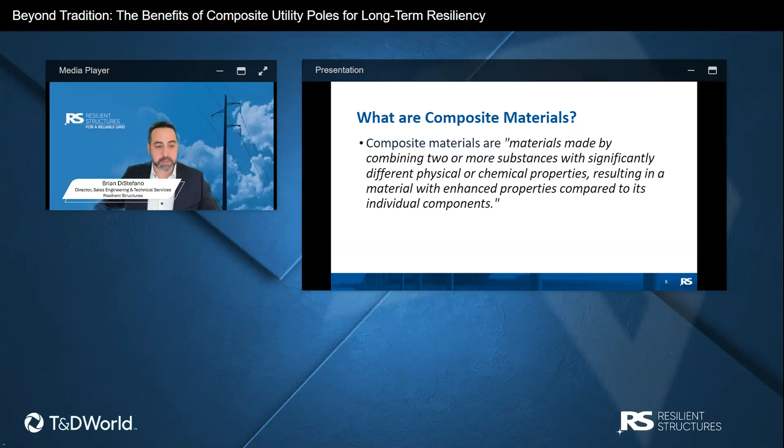Okay, great. What does that mean, right? When it comes to composite utility poles, sometimes they're called FRP poles, which stands for fiber reinforced polymer. They're basically made by combining fiberglass and resin, just like you see on the screen. We have fiberglass rovings, and they're soaked in resin, and they are made into a pole. Sounds simple, but it definitely is not.

Exactly how these two materials are combined to make a superior utility structure, I will go ahead and explain in some future slides. But just to get into a little bit of the individual components, the fiberglass that's most commonly used is called e-glass or electrical glass. It's commonly used in many industries, including construction and marine applications, and of course, utility poles. It got its name because it was originally developed for insulating electrical wires, and then they found many other uses for it. So the fiberglass piece of it is very common. What really sets composite poles apart from each other is the resin that's used, as well as the manufacturing processes. That's really what differentiates composite poles and composite utility pole manufacturers. All composite utility poles are a combination of fiberglass and resin, but not all composite utility poles are the same.

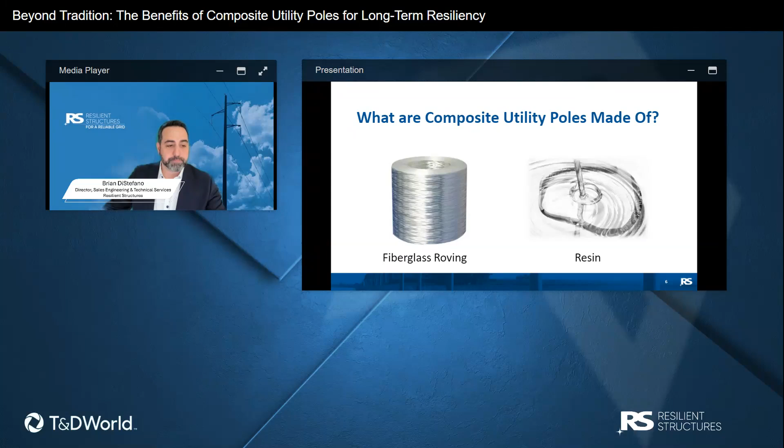I'd like to discuss the three primary resin types commonly used in the composite pole industry: polyurethane, vinyl ester, and polyester.

Polyurethane resin is the resin of choice here at RS for a wide variety of reasons. We actually use a proprietary recipe of two different types of polyurethane resin in our product, which I'll explain later. Polyurethane is very strong, very impact resistant, has excellent UV resistance, excellent screw retention, and offers a very good balance of flexibility and durability. The downside is it's the most expensive of the three, and it's also very difficult to use in a pultrusion manufacturing method, which I'll get into as well.

The happy medium is vinyl ester, which is less expensive than polyurethane. It's easier to manufacture with and to handle, provides good durability, excellent chemical resistance, and bonds very well to various substrates. It's less expensive than polyurethane but more expensive than polyester.

This resin, along with polyester, uses styrene to help the resin cure. Styrene has a very distinct smell. If you've ever walked into a boat yard doing hull repair with fiberglass matting soaked in resin, it's a very distinct, strong smell of volatile organic compounds, VOCs, emanating in the air. You cannot mistake it. So for the comfort of manufacturing workers, and for residents or other businesses in and around a plant that uses styrene, it's not the most comfortable type of environment.

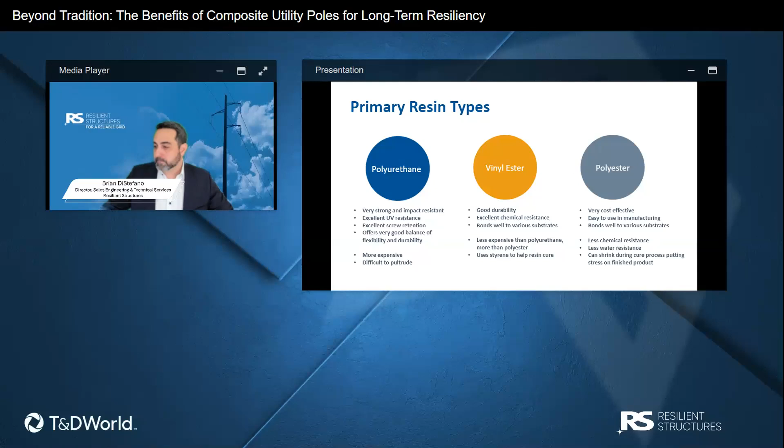Next, I wanted to briefly share some of the mechanical properties of the three different resin types. After reviewing this, it should be pretty evident why RS chooses to use polyurethane resin for its poles. When you compare the three resins, you look at flexural strength, compressive strength, bearing stress, and interlaminar shear.

What you'll see is that polyurethane outperforms vinyl ester and polyester by a significant margin. These reasons, coupled with polyurethane's outstanding UV resistance, are why RS chooses to use it despite it being the most expensive and difficult to manufacture with. Manufacturing with polyurethane has taken RS years of R&D to perfect, but we believe it produces an absolutely superior product.

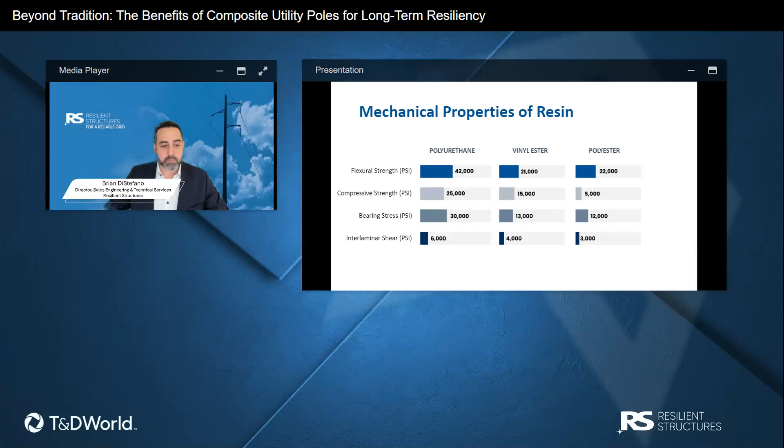Now, allow me to shift and discuss two different composite pole manufacturing processes.

Filament winding is the process RS currently uses to manufacture pole modules that make up our composite utility structures. The process involves saturating fiberglass strands with resin and tightly wrapping them around a tapered mandrel, as shown in the illustration. Multiple alternating layers are applied with fibers arranged both around the circumference of the mandrel and along its axis. The circumferential layers enhance the hoop strength of the structure, while the axial layers contribute to its bending strength and overall stiffness.

After constructing the module, the resin bath is switched from an aromatic polyurethane resin to an aliphatic polyurethane resin. This is the first time I've introduced those terms, and I'll explain more about that. The aliphatic polyurethane resin, which forms the outer coating of the module, is tinted to give the pole its final color, either brown or gray. These final circumferential layers are applied with a very high resin content, higher than the resin content of the structure beneath, resulting in a resin-rich surface that boosts the finished product's durability and significantly enhances its UV resistance.

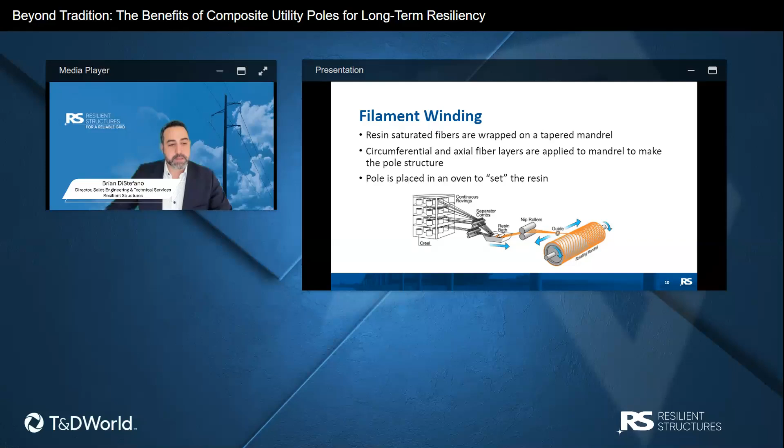So here is a cross-sectional image of one of our poles. You can observe the distinct layers. The gray regions consist of the aromatic polyurethane. That aromatic polyurethane, although it doesn't have great UV resistance, gives the pole its excellent structural integrity and provides the core strength and structure of the pole. The outer brown layer gives the pole its final color, but more importantly, that is the aliphatic polyurethane layer, which offers durability and UV resistance, as I mentioned in the prior slide.

UV exposure is the primary cause of composite degradation. All composite poles include some form of UV protection—they must. So a lot of manufacturers will actually apply a thin UV resistant paint that's microns thick. Our product features an integral outer layer, 1 to 2 millimeters thick, of aliphatic resin, ensuring that the pole doesn't chip or require any kind of periodic reapplication. The robust design here is crucial for long-term resiliency, particularly in extreme environments. It enables the utility to rely on the performance of the product, engineered to endure over 80 years with no required maintenance. So we're pretty proud of that process.

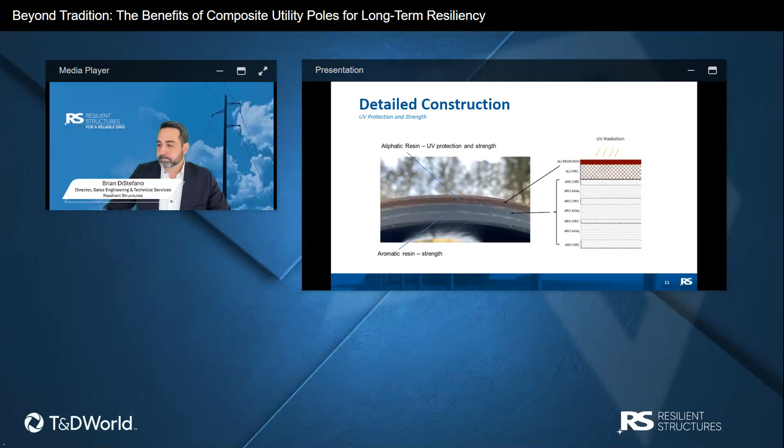A common question we get from utilities is why we don't use a veil cloth. The reason for that is, in pultrusion processes, a veil cloth is typically required to achieve a resin-rich surface, which prevents fiber blooming and also gives the pole its outer layer of strength for damage resistance. Our manufacturing method inherently produces a resin-rich surface without a veil cloth necessary, so we don't need to add one. The final resin-rich surface, with all that aliphatic resin, provides the finished surface. That's actually a pretty common question that we get.

So I mentioned pultrusion a few times. Just to go into the process a little bit more, pultrusion is a manufacturing process in which resin-saturated fibers are pulled through a heated die—very different from filament wound products. To form a resin-rich surface in pultruded poles, a veil cloth is typically required, which is what I mentioned in the last slide. One advantage of this particular method, though, is its continuous operation. Parts can be manufactured indefinitely and then cut to the desired length, all without interrupting production. Pultrusion also produces a uniform, non-tapered profile. However, the height of the pole made through this process is limited by its base diameter, so larger dies would be needed for wider bases, which could require changing out equipment, causing production downtime. Also, using polyurethane resin in this manufacturing process presents many challenges and is quite difficult.

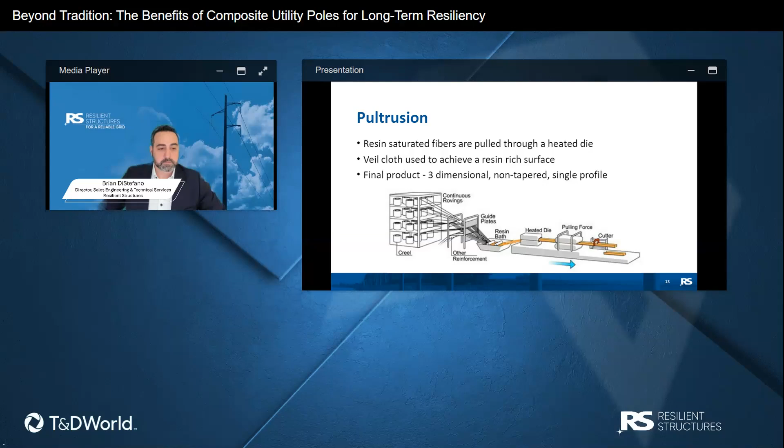Okay, so now I'd like to move on and talk a little bit more about Resilient Structures and what makes us unique.

Resilient Structures, RS, was founded in 1995 and have been making composite utility poles since 2005. This year, we're proud to celebrate our 30th anniversary in business and our 20th year making poles. We have invested over $400 million in composite material science, R&D, and commercialization. We currently hold 71 patents and 13 trademarks. We have had no structural failures due to extreme weather events. We manufacture 11 modules that can make up over 260 different finished pole combinations.

An overwhelming majority of what we sell and deliver, however, are fully assembled poles, similar to the way that you might receive a wood pole. Customers generally like that because if they're not space constrained in their yards, it's much easier just to pick up the pole and set it just like you would a wood pole, rather than having to put it together on site. We have over 500 customers in 30 countries around the globe, and since 2005, we have manufactured 1,200 linear miles of poles, which is enough to stretch from El Paso, Texas, on the west side of Texas, all the way to Montgomery, Alabama.

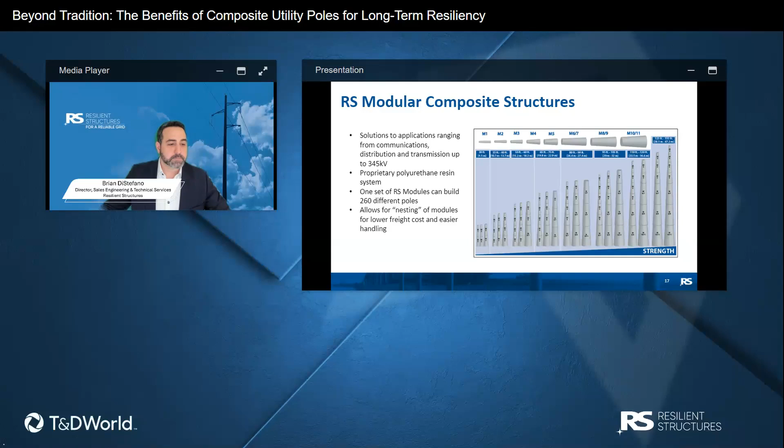Okay, so I'm going to move on to handling, storage, and testing.

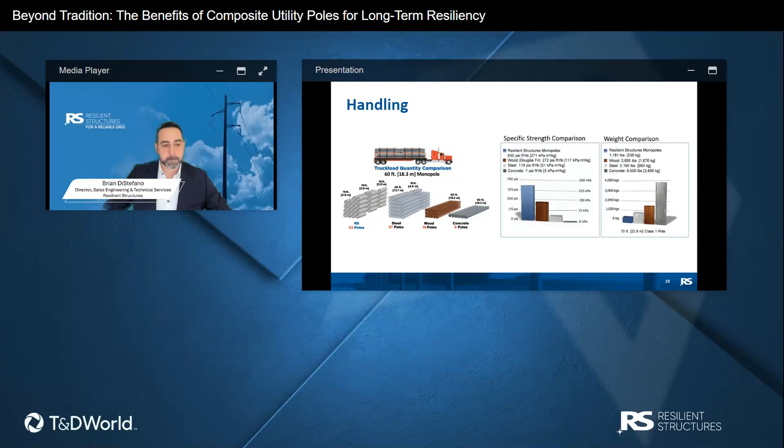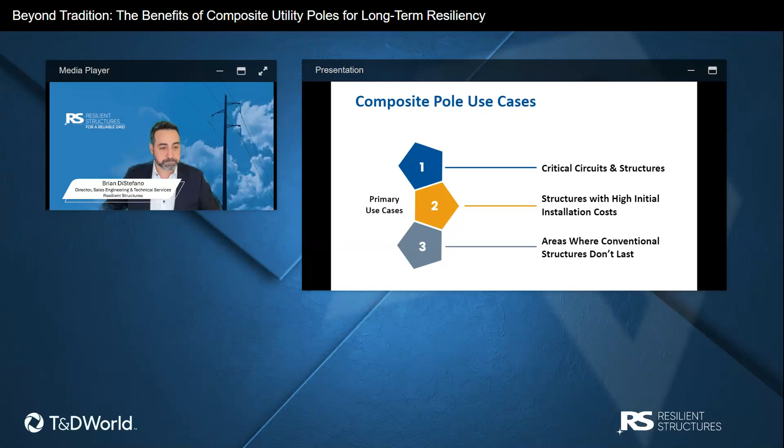Transformer banks, cap banks, manual switches, motor operated switches, smart grid equipment—the cost of all this equipment varies widely, but it could get very expensive. These are things you choose not to have to replace, of course.

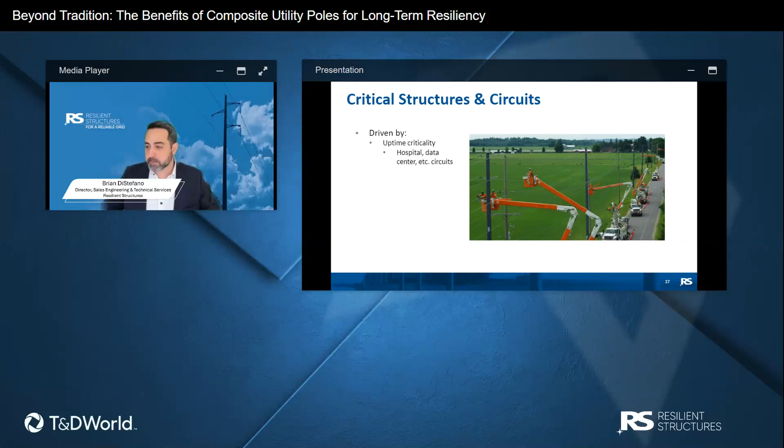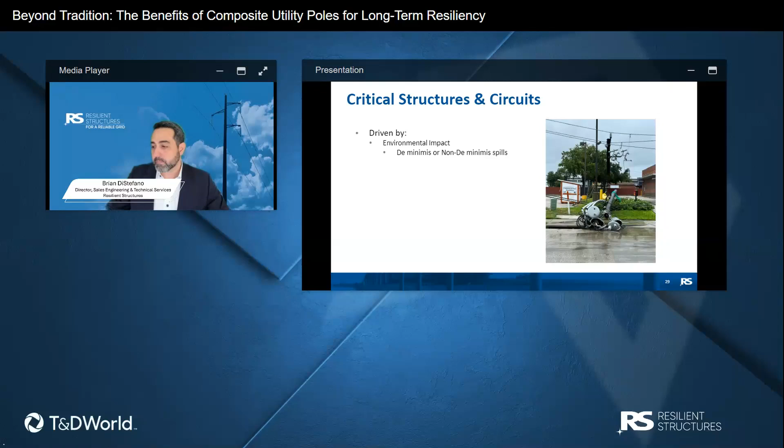Okay, moving on to the second use case. Everything I just talked about for the past 5 minutes is all part of use case number one, which is critical circuits and structures. Now we're getting into structures with high initial installation costs. These are areas where heavy equipment is not an option or will damage property. In these areas, heavy equipment cannot be used. Being able to install a utility pole using only manpower and hand tools is a major advantage.

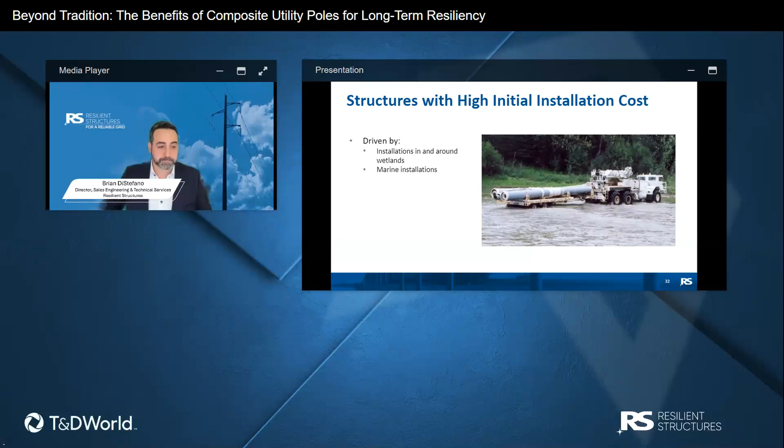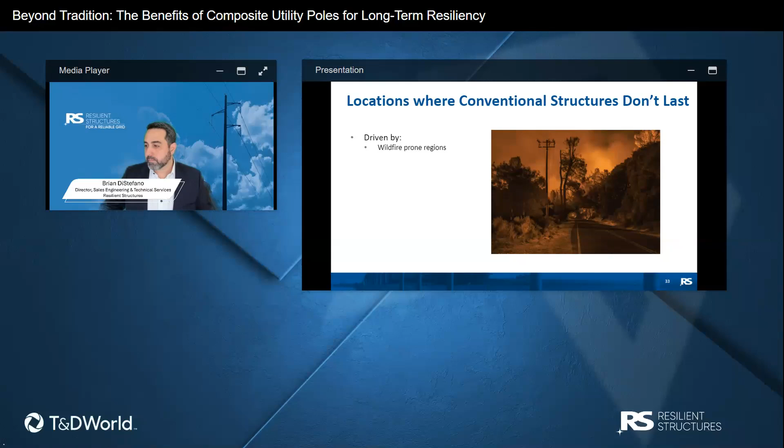Okay, destructive wildlife: woodpeckers, beavers, bears, termites, right? Also areas with poor soil chemistry where wood poles just don't last the way they're expected to. Many of you may be familiar with areas where woodpeckers frequently damage poles. I know in my area, when I was at the utility, we had this problem. We also had a problem with beavers. They chew through them, leaving behind a weakened, pencil-thin base, with the pole just waiting to fall over. Composite poles are engineered for long-term resiliency, and they do not attract destructive wildlife at all — that includes woodpeckers, beavers, bears, termites. They remain unaffected by any of these challenges, including soil that's not ideal. It doesn't affect composite structures at all.

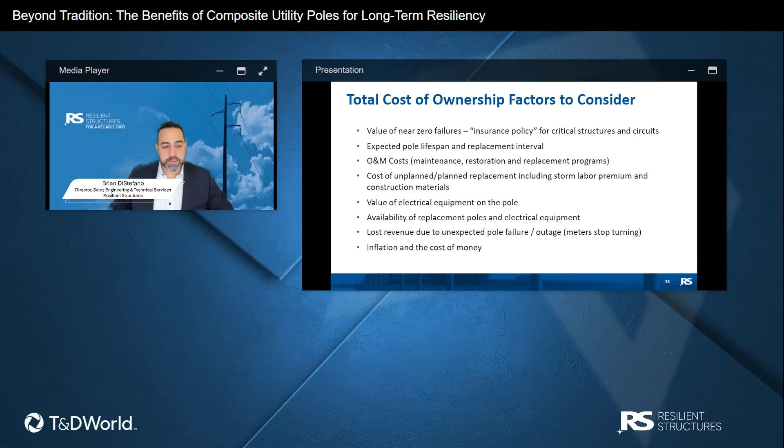Okay, and with that, we have come to the Q&A section of the presentation.

Thanks so much, Brian, that was a great presentation. And to tell you the truth, I wouldn't mind seeing some of those manufactured at some point, so maybe we can get out there.